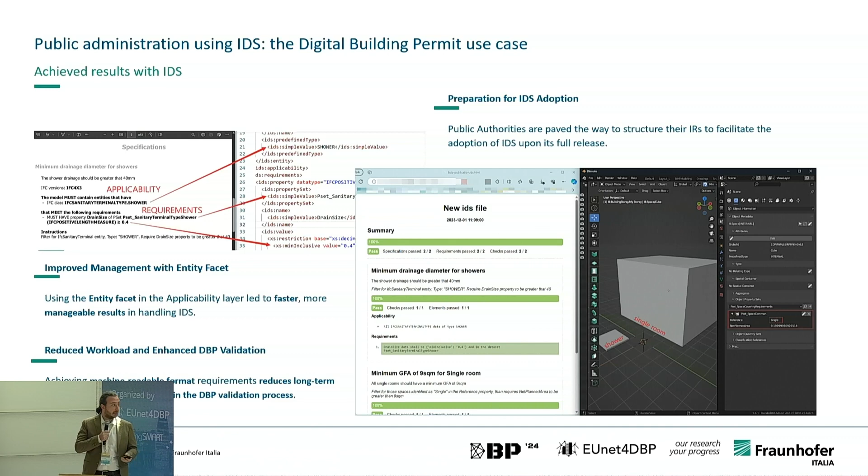Among the different tests we conducted, the management of these checks leads to better results with the help of the entity facets, one of the six available for the standard, and it implied a reduced workload for digital building permit validation. Still, this is not the end.

Of course, the standard is not fully released yet. There are plenty of things that can be improved, and the standard itself has some limits. It is hard to express complex requirements in this standard.

Maybe some achievements can be obtained from using another of the facets, the 'part of' facet, as it implies the study and leveraging of the relations between the entities in the schema.

Of course, geometric and dynamic conditions are out of the scope of this standard, so whether or not that changes, it implies that maybe this standard will have a broader approach, including some geometric conditions, or we actually manage very carefully how to put the information inside the model.

One of the limits is also the rigidity of data structures. Once we build and create these data structures, there's not yet an automated way to update them, so it has to be redone manually.

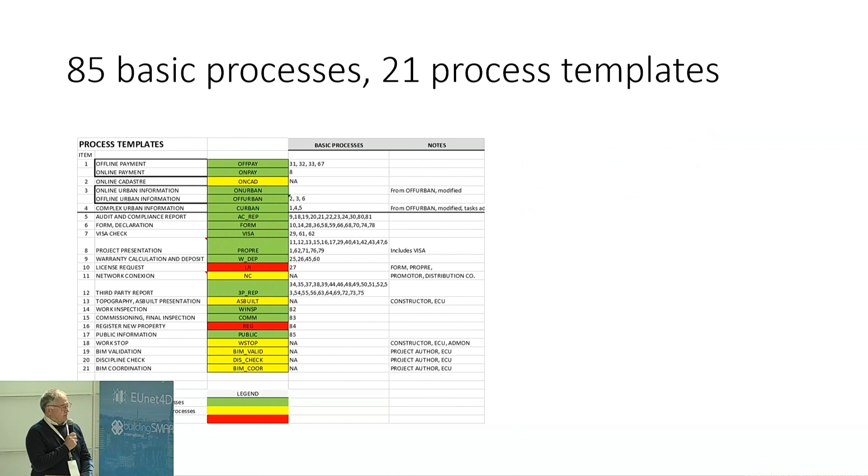We use as a base the description, the legal description of the process in Madrid, because it was a very updated regulation. Based on that regulation, we identified about 85 basic processes.

From those 85 basic processes, we derived 21 processes, like this one here. And with these 21 processes, we performed a lot of simulations.

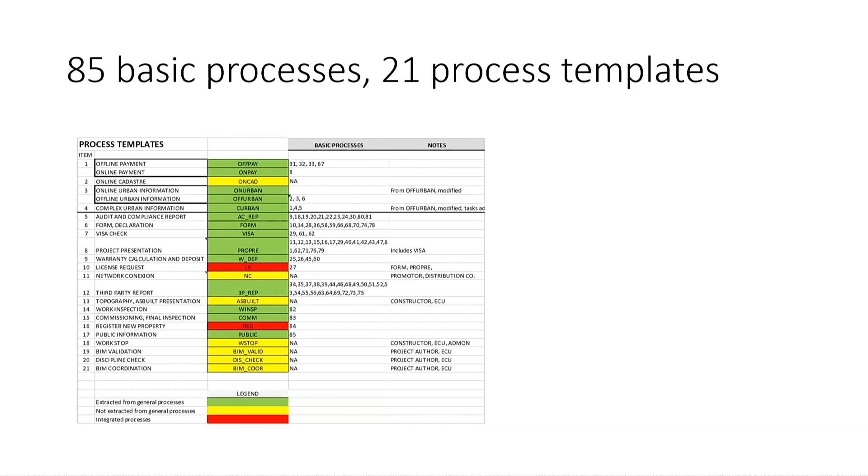The idea is that as soon as you prepare a protocol for privacy, you should be able to check what is the impact on the process if you apply the protocol.

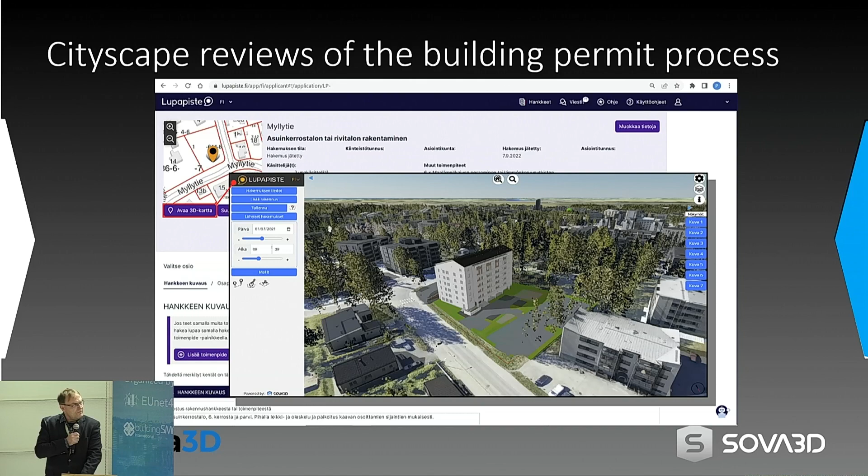And there's the view of how it is used nowadays in our client municipalities. But beyond this background, this GeoBIM, I could call it like a city model, is used in many use cases before and after as well, which in this case you can see in planning 3D visualization.

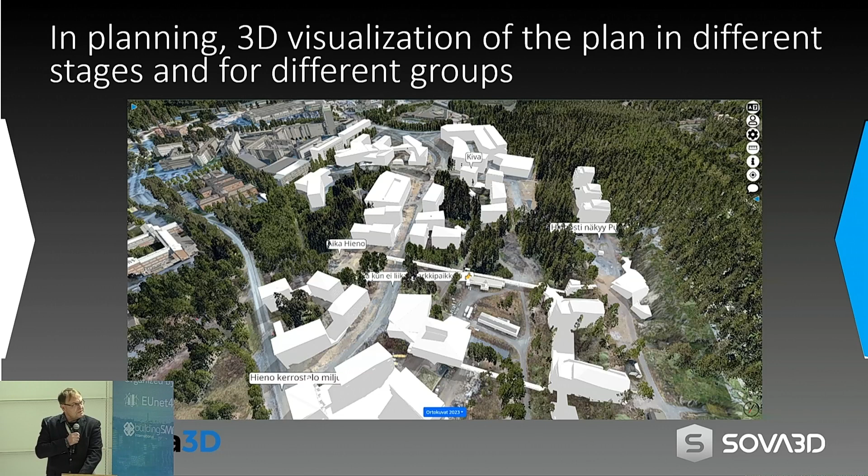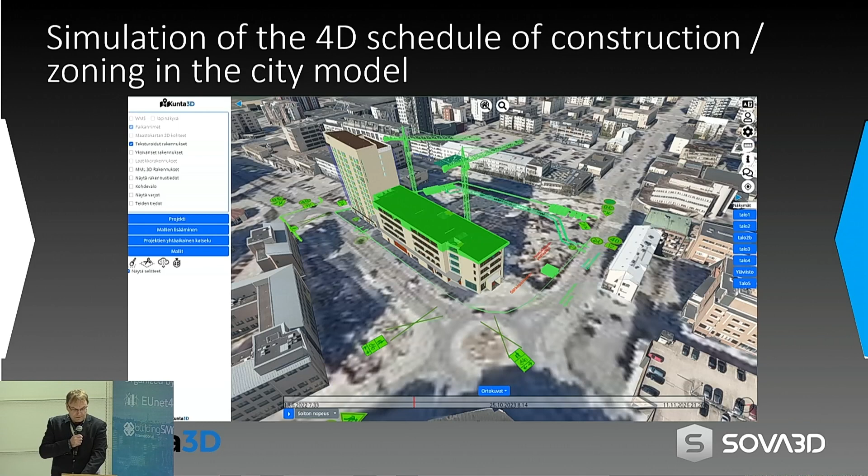Here you can see the simulation of the 4D schedule of the construction zoning of the city model, and IFC models are intensively used there, actually the IFC 4D features included, so you can demonstrate the progress and some other issues on it. And then you can also get users involved by polling, commenting, and presenting users their own suggestions for upcoming new development areas.

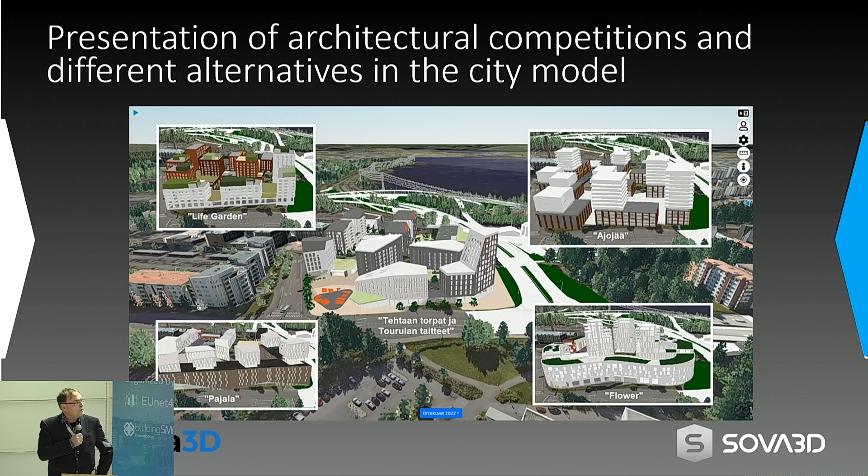And one use case is the presentation of architectural competitions, like this case from the city of Jyväskylä, and also different alternatives of the city model can be evaluated.

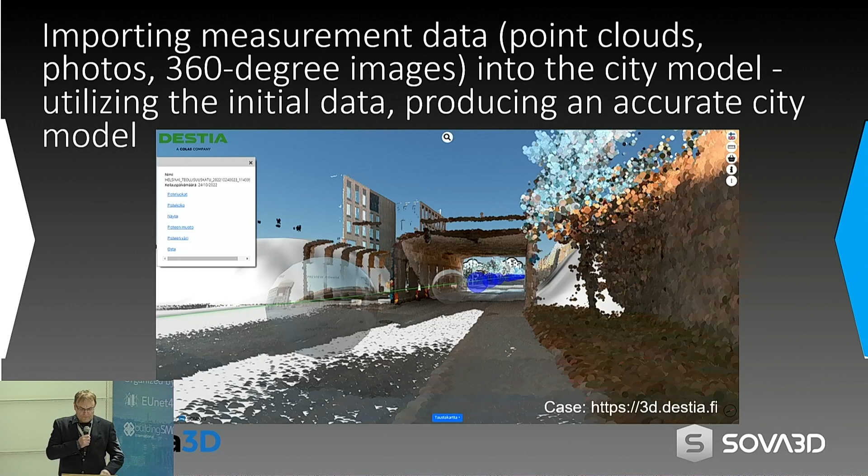Nowadays also laser scanning and that kind of methods are more and more common. For example, there's a case of Destia, which is laser scanning 44,000 kilometers of roads of Finland, and they are importing them on a web browser to be sold for the municipalities for other use.

Here you can see the infrastructure models, how they are used as well there. And some of the nice new things is that after the building has been completed, you can use it as a part of the metaverse as well, and use it on other domains like tourism, museums, and so on. We have made some samples there.

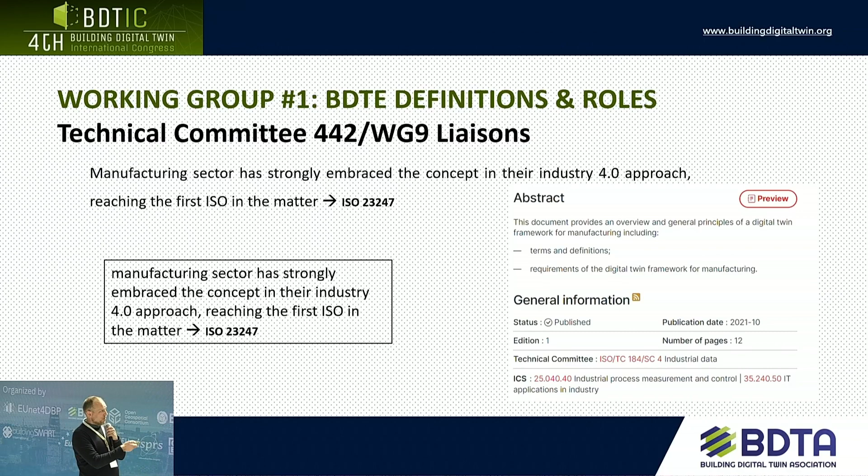More than 70% of the use cases received had more than one purpose in mind. And I think that's really key, so to look for synergies. So we are obviously working on liaisons with other groups, and working on the ontology.

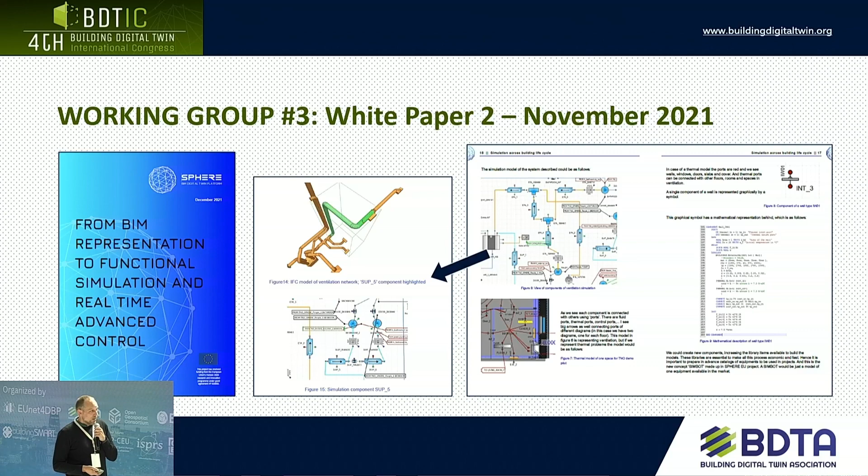In terms of simulation, we are proposing new concepts. We have new European projects, so we are putting a lot of effort on that. There is also material you can download to see how simulation is going to help get better buildings in the future, and how we think that could be included into the methodology of the digital twins.

So that's our congress, we set the fourth actually on Wednesday, as forming part of the digital building permits. This time we went back to Barcelona, and somehow we achieved to get digital building permits here, so thank you for coming to Barcelona.

So I think there was a lot of slides, probably too much information, but everything is open, you can go check it out. And just saying, if you want to be part of our community, we will be glad to make this bigger and to make this happen. Thank you.

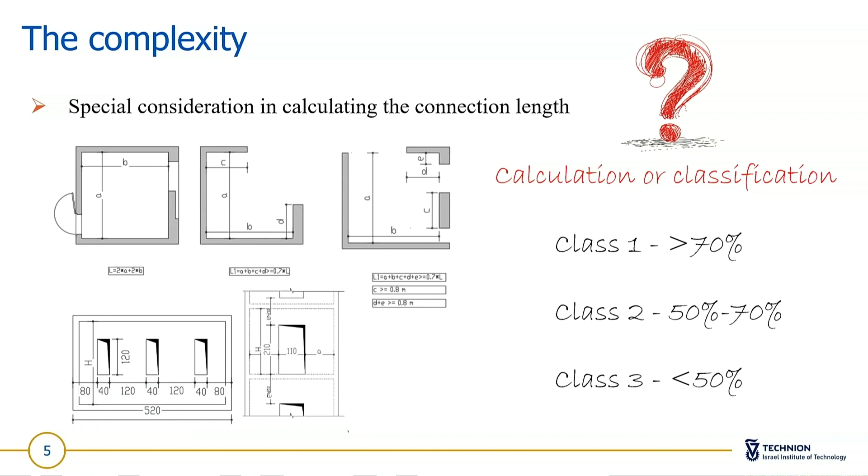For example, if I have a wall with an opening in it, sometimes it will be counted inside this ratio of supporting walls, but sometimes it will not. It depends on the configurations of the walls on the same level, on the sizes of the openings, on the distance between the openings, but also on the relationships to the other openings in the walls on the same level.

So the way that we have decided - what's more interesting, by the way, is that we don't really care about the number. It doesn't really matter if it's 70% or 75 or 85. All we need to know for each space within the security shaft is which of the three classes, that I see here on the right side, these spaces belong to.

So we are treating this in a completely different manner. Instead of actually doing the calculation, we are doing it as a classification task.

And for this classification task, we have chosen to implement graph neural networks, GNNs. GNNs are basically machine learning models, but they operate directly on graphs. The reason we chose to do this is because there are so many relational aspects and relational considerations and guidelines within the regulations. We had to somehow find a way to express that within the machine learning model, and topology graphs are actually perfect to do that.

This is probably not new to anyone - every time you're doing something with machine learning, you always have a problem of data for training. So we had it as well. We had to generate our own data set for training, a synthetic one.

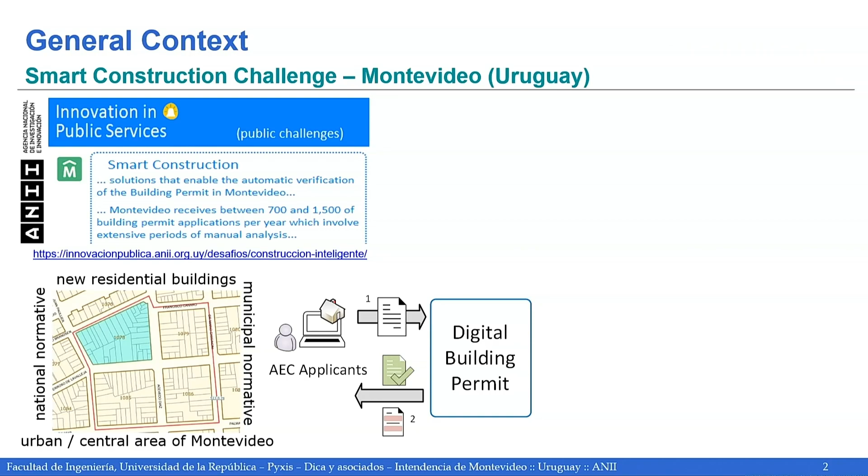In Uruguay, we have a program of innovation in public services, and the municipality of Montevideo proposed a challenge in this program: a solution that enables the automatic verification of building permits in Montevideo. The scope of the challenge was a part of Montevideo, these 4 blocks in a central area, for new residential buildings.

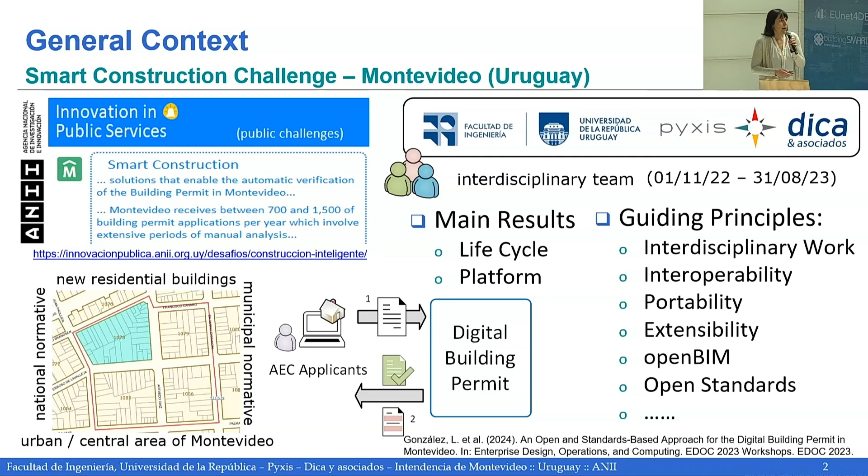In this context, the university, Pyxis and Dica joined forces to form an interdisciplinary team comprising architects, civil engineers, software engineers, and BIM experts. We worked for around 9 months and developed such a solution. Our main results were a life cycle for compliance management in this context, and a platform supporting this life cycle.

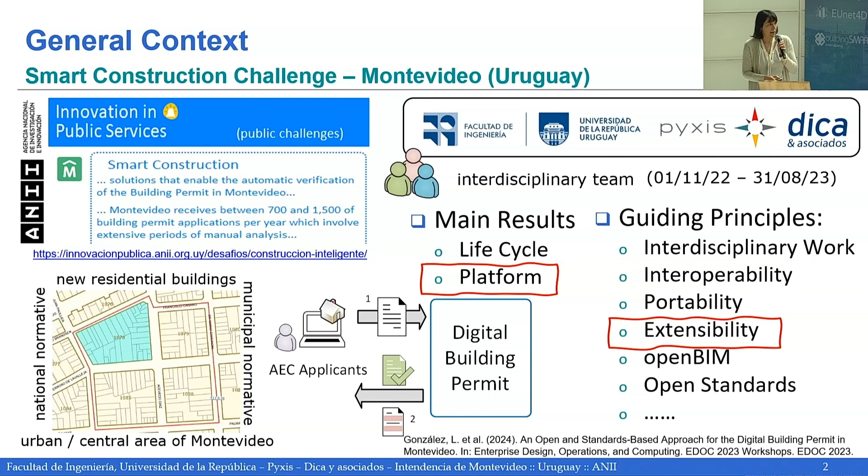We have some guiding principles for our solution. Here we are going to focus only on extensibility within the platform that we propose. If you want more information about the whole work, at the bottom of the slide you can find another publication with the full details.

What do we mean by extensibility? In general, extensibility of a software solution is the possibility to add features and new capabilities to the system without the need to update or modify its core. We believe this is a relevant quality attribute for DBP solutions, because we can extend the solution to another geographic location, another type of building, another building permit requirements, or other compliance mechanisms. In this work, we focused on how to extend our solution with new building requirements and compliance mechanisms.

Before getting into extensibility, I'll explain a little bit how our platform works. The main idea is that applicants work in a modeling tool, modeling the building. Then they export this building to an IFC file and upload it to the platform. The platform performs some checks, and if everything is okay, the file is stored in a file server. Then the core of the system performs some tasks in order to return an answer to the applicant.

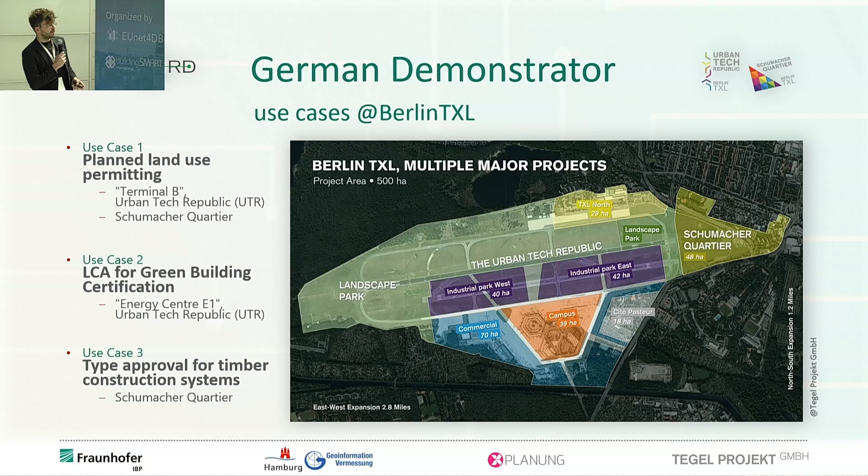which Kai-Uwe will take on: planned land use permitting. And here you see the picture of how we imagined it. So it's formerly the first place of arrival when you just came to the former airport. It will be completely renovated and get a new use in coordination with the conservation authority. So if you want to do changes, you will completely need a land use plan which contains textual and graphic information.

So the main question is how we can convert this to the semantic planning law data. And the specific aim for this use case is that we want to create digital and linked data capable development plans with the use of X-Planung and the Inspire PLU. And now I hand over to Kai-Uwe, who will provide us some information about Xplanung, Xplan GML, and OGC API for features.

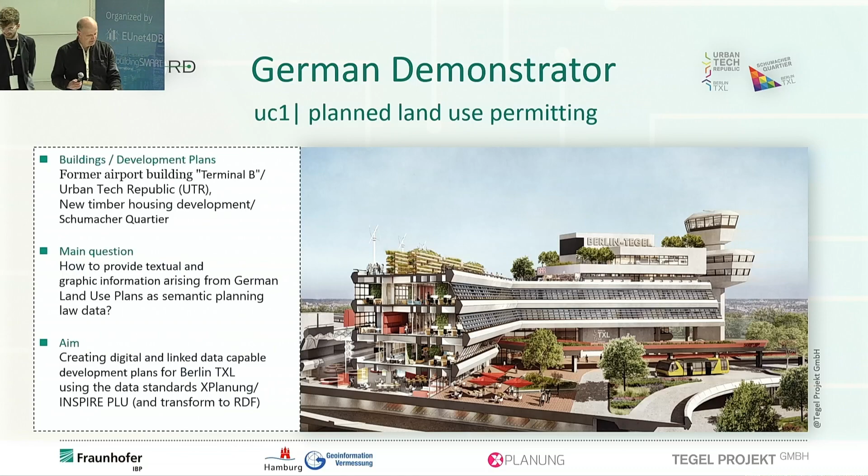better it is. And the question is how to deal with this complex information to store it in a machine-readable way. So many of these regulations have to be checked as part of the planning permission processes, and they are stored in a graphical way as well as a textual way, and some of them you've got to take into account

to hold both, as well as textual regulation and cartographic information. And I doubt that the use of the rules-as-code method for the interpretation of regulation in the development plans is scalable. We heard a lot in the last presentations about the rules-as-code method, but these plans are local laws and they are individual. Do you have an impression how many local plans we have in Germany?

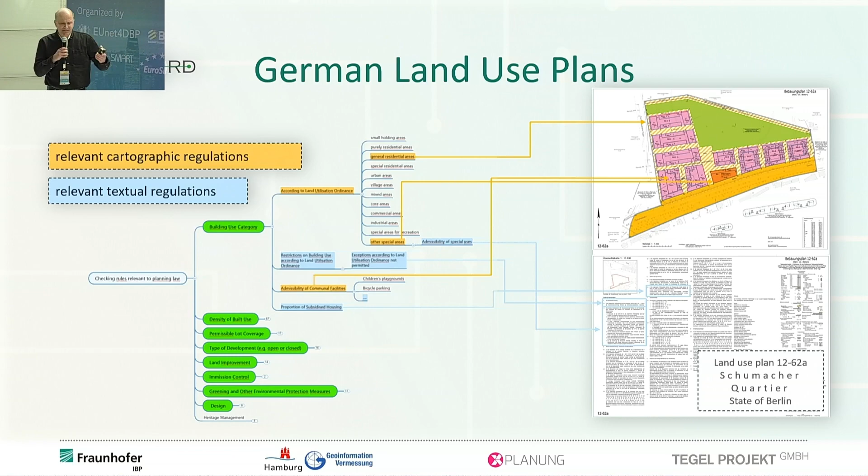Now the question is how to represent this information in a machine-readable way. This is where Xplanung comes in, and I use Xplanung and Xplan GML. Xplanung is the object model, in UML, and the data format is Xplan GML, a GML application format. But we can also represent the content of Xplanung in JSON format.

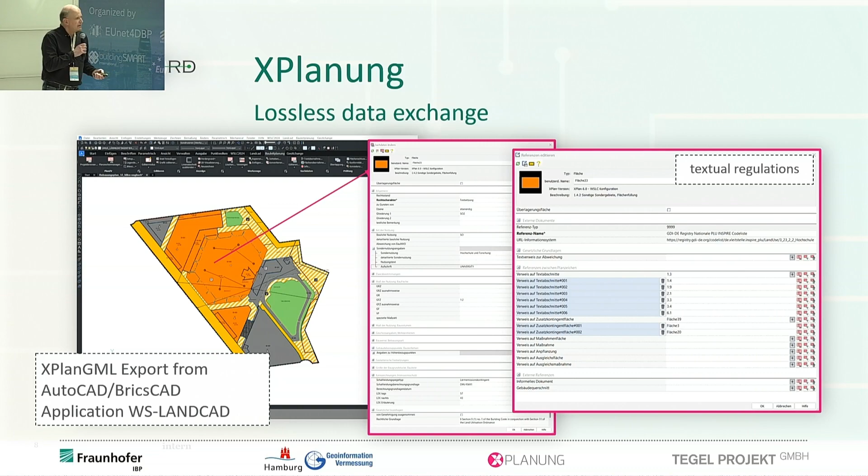It's possible to have a lossless exchange from one CAD or BIM program to another, for example this is an AutoCAD representation from Xplanung. You can export it and import it, for example, in ArchiCAD, more or less lossless. This is the goal of Xplanung.

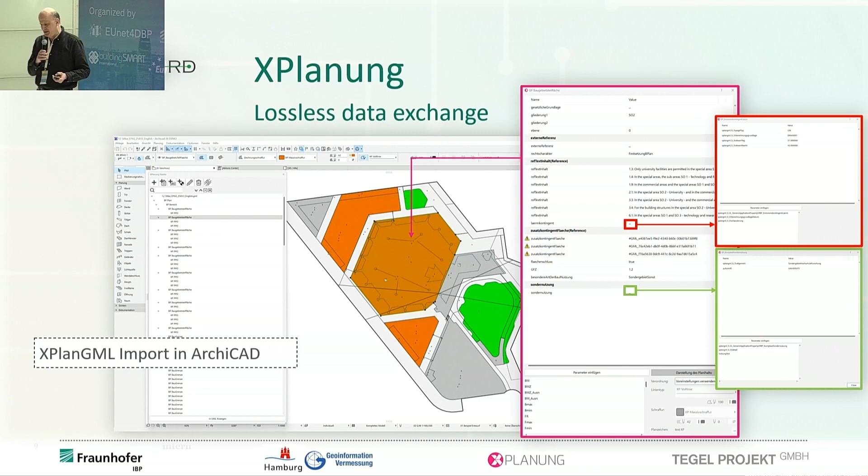This is furthermore what we did in our Accord project. We just design the legal land use plan, but we extended it a little bit. According to the object model, it is possible to define relations, for example between the zoning elements and noise protection areas. But you've got to define this relation.

So we extended it, made it linked-data capable, and translated the German regulations into English. There's a national code list for all this German regulation. We extended it, imported it into an Xplanung database, and provide this data as OGC services or OGC feature services, and we also did it for the Inspire planned land use data model.

Here's an example of how we provide this data. It's an interface of our service, an open API for feature service. You have access to the data, and all regulations have a unified URI, so you can access it.

Our goal now is to enrich the data model as well as our planning, our legal land use plan. Then our goal is to define checking rules for the building use, the extent of building utilization, the plot coverage ratio, floor space index, noise level. This is all - yes, our goal is to define some SPARQL

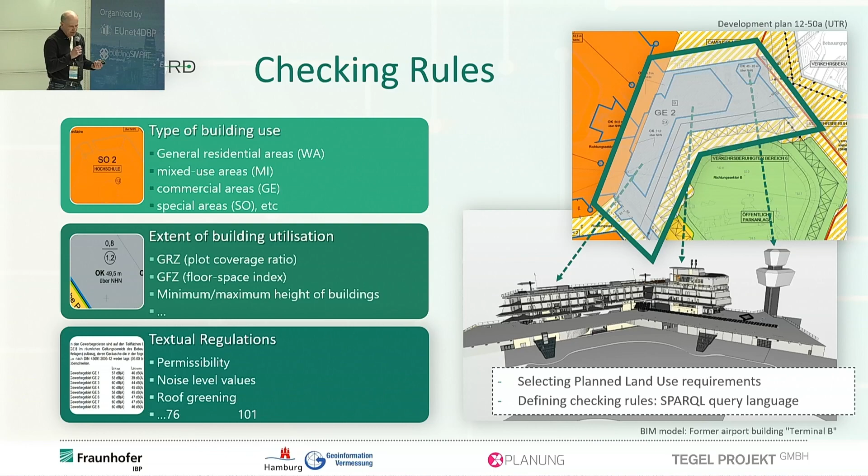requests on this triple store representation, so we can check against these checking rules.

So the conclusion: it is possible to represent complex textual and graphic information in a spatial land use plan in a machine-readable way, and we can access this data with OGC services. Vladimir will tell us more about transforming this data into RDF representation, and then we hope that we can define some SPARQL requests so we can approve our regulations. So that's all, I hope I was a little bit in time, more or less in time.

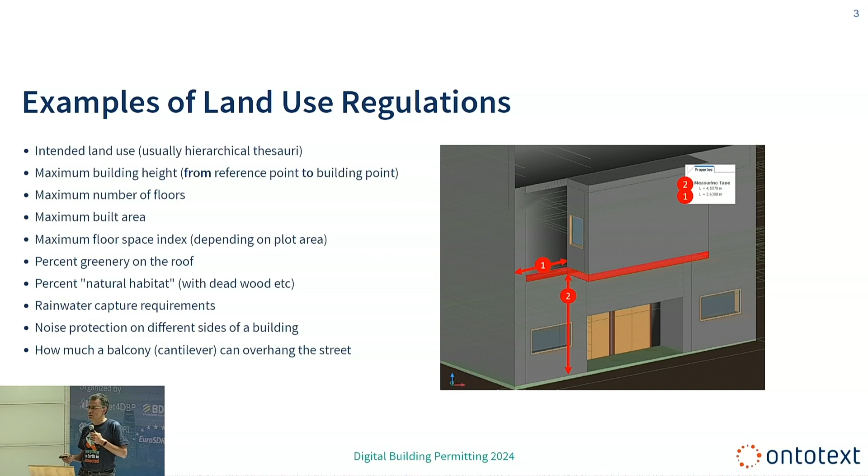Here's an example from the Spanish case. If you have a regulation that says cantilevered parts or balconies cannot overhang the street too much - how exactly do you find what is a balcony? How do you find where the street is? How do you calculate distances? These things are not so easy.

I won't talk about Tegel because this was already covered. I'll just say that the Tegel regulations are extremely detailed and specific, the German way. Maybe that's why builders still find it hard to go and build in Tegel.

Here's an example from this LDProxy - these little blue things we'll have a slide about later on. This is an open story, basically a passage between buildings, and it's not very clear whether that belongs to one building or the other, or if it's a shared building part. How do you check it? Does one building fall into one planning zone? Normally you would expect that. And if it falls into several, how do you then collect all the requirements from these zones, or is that a violation?

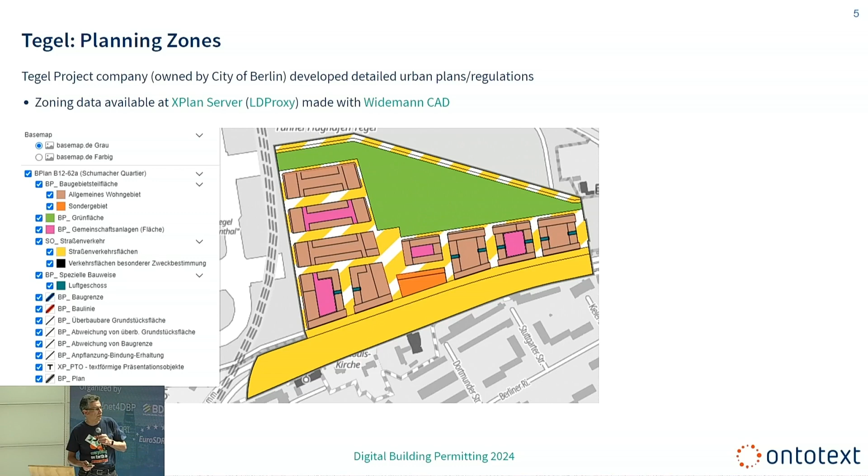Here's a few examples from the German regulation regarding greenery. Not only that, they say part of the roof must be made nice for insects, and you must have dead wood in whatever percentage. Here's this Luftgeschoss, and it took us with Hamburg maybe two sessions of three hours each to figure out what it means and how we can possibly check it.

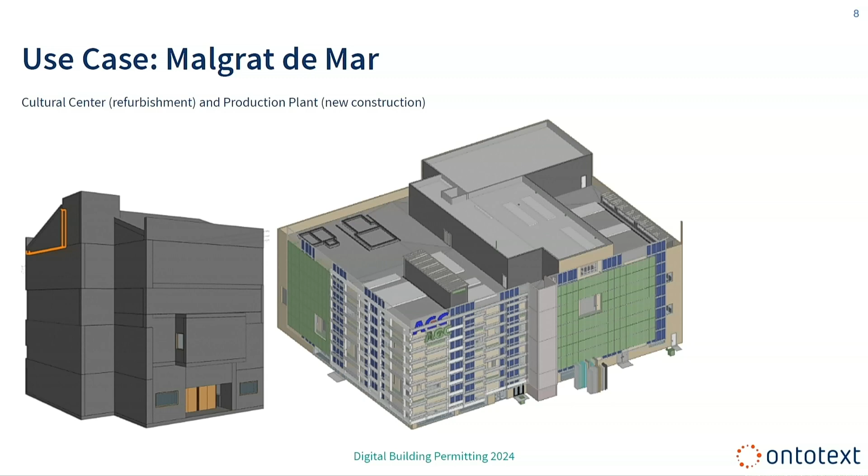Now for the Spanish case, there we need to check a cultural center on the left - a refurbishment project - and a new production plant on the right. Their regulations are split by the kind of site: is it an isolated site like the plant, or is it seated between buildings and must align with the street grid and so on?

There's detailed information in BIM, and the land use that's in the POUM, cadastral zones which are in GML but not CityGML and not Inspire PLU, and also topography. What I don't like is that their land use classification is not very clean. At the higher level maybe it's okay, but at the bottom level, what is this last line - tertiary industry, but more specifically the Bobila area? I don't know what that means.

So the kind of checks that we'll need to do - I already mentioned maybe the more complicated check about cantilevered parts.

We still do not have the information that binds zoning parameters to the zones, to say in this zone you can only build 30 meters high and 5 stories, but we'll find out where it is. Now I turn to what standards are applicable in this case.

Of course, IFC for the buildings, but then GeoSPARQL, because we have a semantic database, so we want to use it to do the checking. GeoSPARQL is the way to get geographic data in RDF. CityGML is quite important, because if you have an IFC file, you face the difficult question: how do you georeference it? And which geographic coordinate system are you going to use?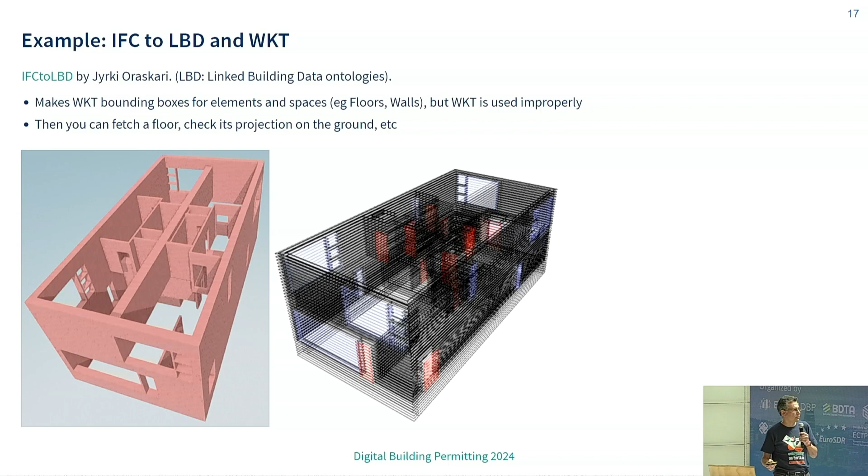And that's it. We are, by the way, actively looking for partners because we cannot become experts in any vertical domain, but we're interested in many. For example, we're very strong in electricity. In electricity, there's the common information model, which is the foundation for the European single electricity market, so you can do electricity balancing operations across Europe and sell and trade and so on. I hope to talk to some of the ICO companies here regarding partnerships. Thank you.

Thank you so much, Vladimir. That was a wealth of information, but I do get it. I have a nerdish husband, so yeah. I'm thinking about we are having lunch. Should we save these discussions for the lunch? So Konstantin and Kai Uwe and Vladimir, you are still around here, isn't it so? Okay, then I will thank you warmly for all the presentations and all the active discussions from your side. Thank you so much and have a nice lunch.